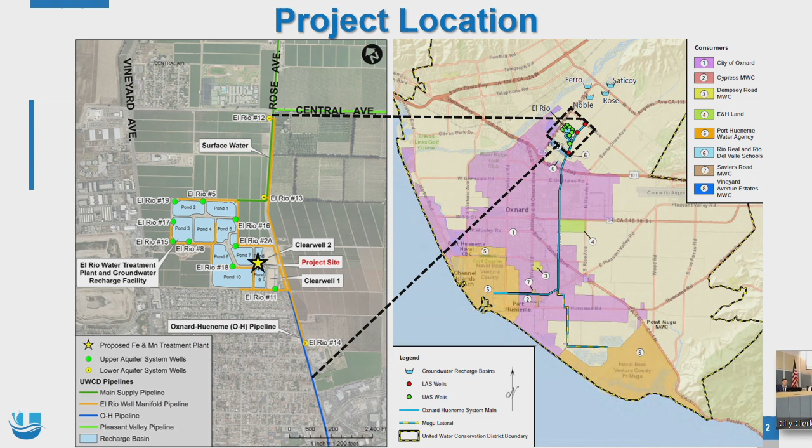We have groundwater recharge basins and several wells. The purpose of this facility is to perform groundwater recharge, but also extract groundwater and treat it for beneficial use through the OH pipeline. The OH pipeline serves several of our customers, including the City of Oxnard, Port Hueneme Water Agency, Naval Base Ventura County, a school district, and mutual water companies.

By way of background, I want to briefly talk about the hydrogeology setting at the site. We have existing wells; 9 of these wells are screened in the upper aquifer system, so relatively shallow wells. What happens is that we operate these wells, the water is treated, and then conveyed to the distribution system.

However, from time to time, especially during prolonged drought conditions, we have a challenging water quality issue: nitrate concentration can be elevated due to insufficient recharge of the groundwater basins. So in order to mitigate and control nitrate concentrations below the maximum contaminant level, we use 3 deep wells. By tapping into the lower aquifer system, the water extracted from these 3 wells gets blended with the water from the upper aquifer system, and that way we can meet the nitrate concentration levels.

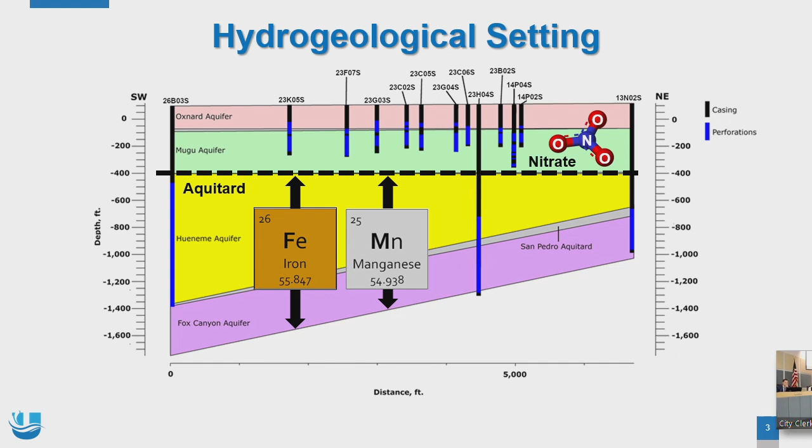Back in 2014, 2015, the Division of Drinking Water ordered us to treat the water from the deep wells, due to the fact that iron and manganese concentrations are pretty elevated, and from time to time they are actually above the secondary MCL, or maximum contaminant level. So we started planning this project and conducted a feasibility study to look at different treatment processes for removal of iron and manganese. The assessments pointed us to a filtration treatment.

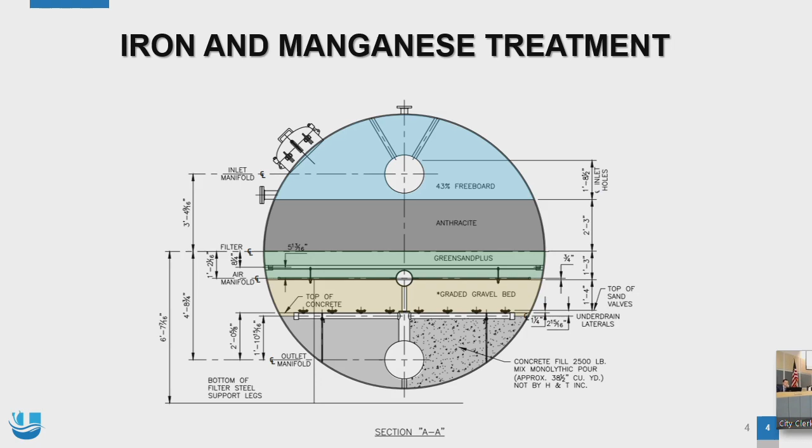And so using the green sand, we would then treat the water from the deeper wells and remove those to the non-detect concentration. Here is a layout of the project. So basically, the water is going to be treated through 2 filter vessels.

And depending on the process and how we control the process, the filter media that consists of green sand plus needs to be backwashed. So the backwash process starts, the filter media gets expanded, and the backwash water is stored in this wash water recovery tank. And once the filter media is cleaned and ready to operate, we would then recycle part of this backwash water into the head of the filtration process, and basically get to pretty much 99% of total water recovery. So there's very little solids that gets removed from the water due to the precipitation of iron and manganese. And please stop me if I'm going into too far details.

And then as part of this facility, we have several metering vaults that support the process. We also have a dedicated building that houses a new laboratory and electrical room with the PLCs and motor control centers that, again, supports this facility and ties this facility to the existing facility, and a blower. So through the backwash, not only we use the clean water for the backwash process, but we also use air to expand the filter media to make sure that the cleaning process is complete, or at least optimized.

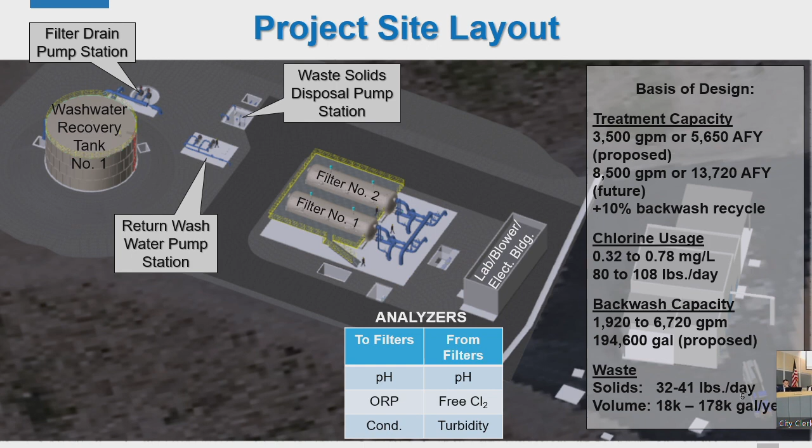So there are several parameters that are being followed or tracked to make sure that the process is functioning as the design intent. And those are included here. Basically, we look at the pH of the water, we look at the conductivity, because that would be an indication of the raw water quality, and the finished water should have chlorine residual, the pH that's being monitored, and other parameters that we are following and assessing.

So the process flow diagram in a simplified manner is as such, that the operation of the upper aquifer system wells continue as it has always been, meaning the groundwater gets extracted, it gets chlorinated before it goes to a clear well, and then again post-chlorination and ammonia is being added to have chloramination as a disinfection agent, and then the water gets distributed to the OH pipeline. With this facility, the water from lower aquifer system is treated through the iron and manganese, and it gets blended with the well water from the upper aquifer system and goes through the same treatment.

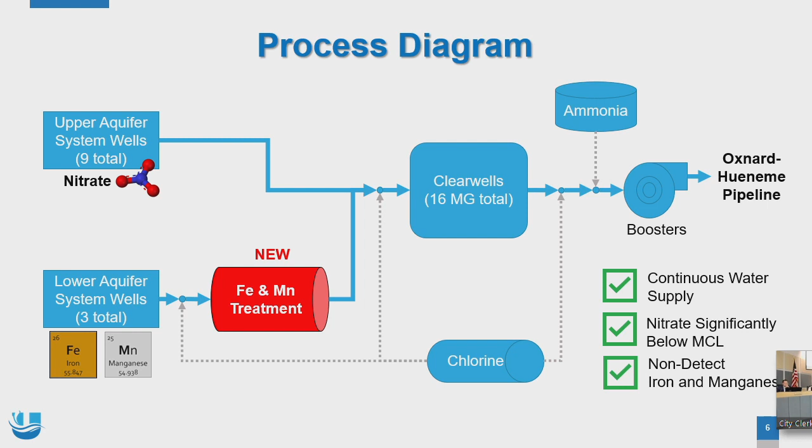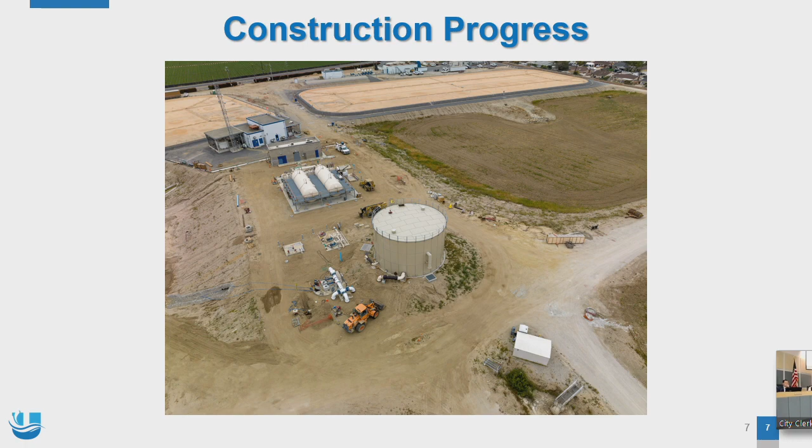So employing this facility, we would have continuous water supply, especially during the drought condition. We would have the nitrate concentration under control and below the MCL, and we expect to have non-detect iron and manganese concentrations in the finished water. In the next few slides, I'm going to show you the pictures of the construction phase of the project and the progress that we made.

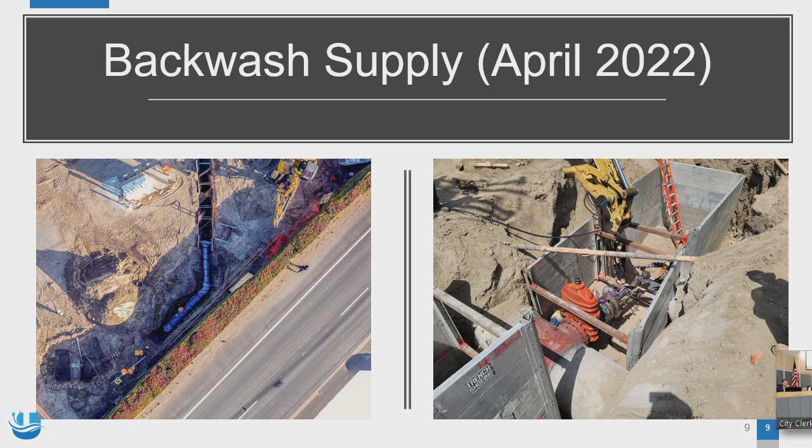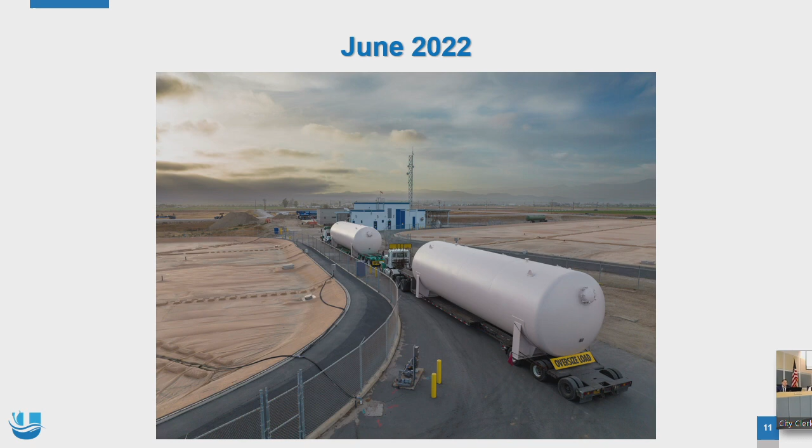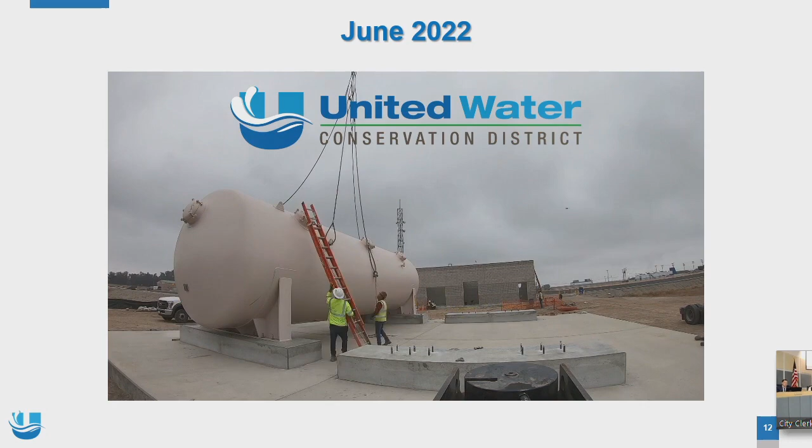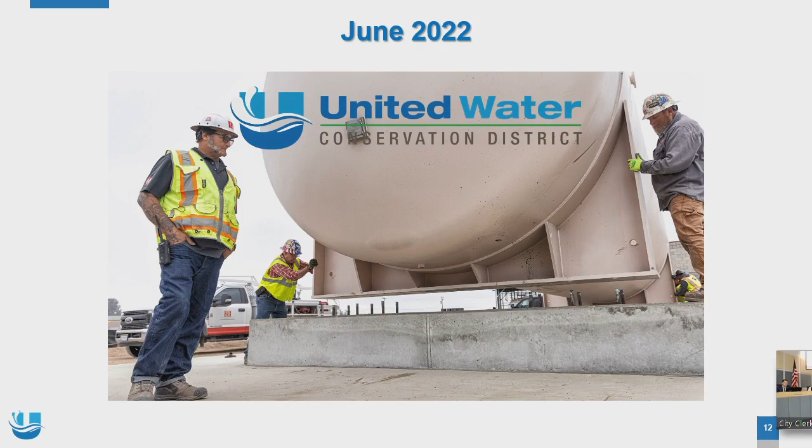So here is a short video of how smoothly and seamlessly these pressure or filter vessels were installed. As you can see, the concrete slabs or supports were already poured, the anchor bolts were already poured. So if things went wrong, then the anchor bolts would not fit properly, but that was not the case, and that was one of the milestones that we put behind us successfully.

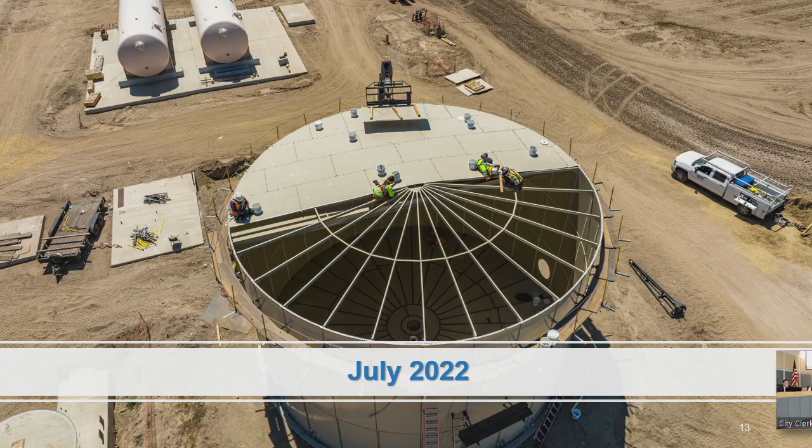In July 2022, a year ago, the construction of the wash water supply was completed. This is the inside of this tank. The tank has got a capacity of 195,000 gallons, so that's a pretty large tank with a 42 feet diameter.

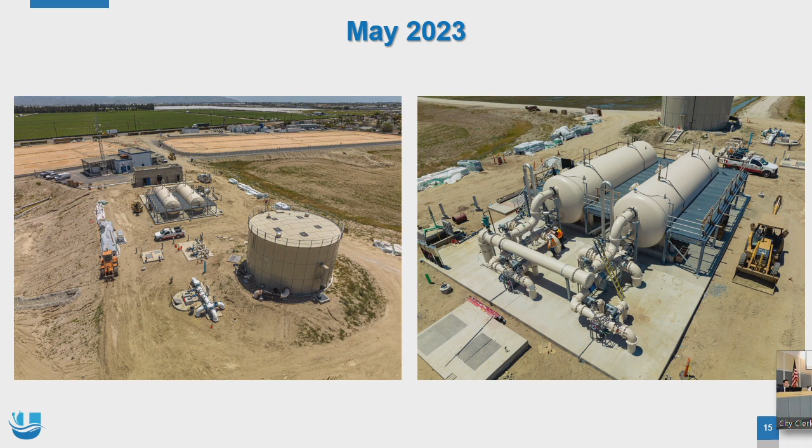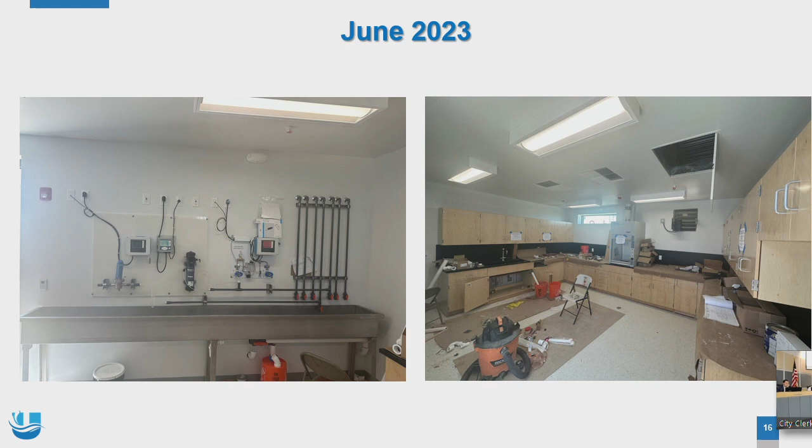It is pretty tall. And so what I can show you in this picture is the filter drain vault, the recycled pump station, the filter vessels, the building in the background, and behind this building, we have the chlorination building that is already in place and has been used for water treatment processes. These two images show the interior of the lab and the analyzers that are installed and sample ports from the different locations through the process.

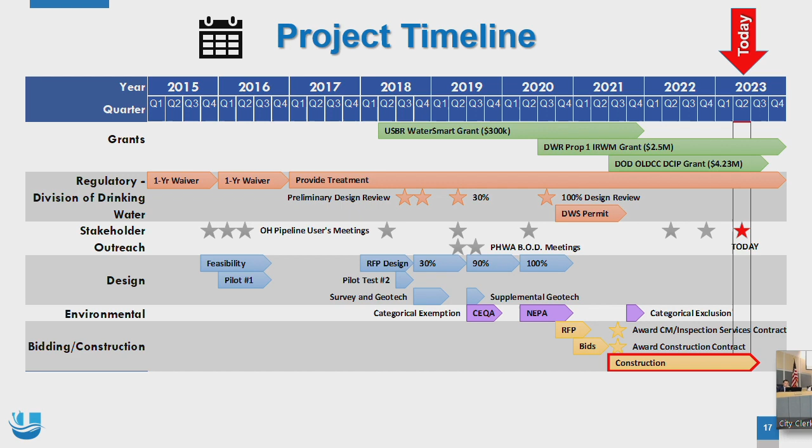This project timeline indicates that we started talking about this project with the Division of Drinking Water in 2015. We completed a feasibility study in 2016 and started the preliminary design in 2017. We conducted 2 pilot testings to make sure that the filter media that we selected would perform as intended. In 2018, we started the design. And in 2021, we went through the bidding for the construction. In the meantime, we applied for 3 grant funding programs, and I'm going to talk about that here.

This diagram shows the total project cost and the funding that was made available to us. The construction cost is $10.5 million, and that includes a couple of major change orders that I'm going to talk about. All other costs related to planning, construction management, and design are about $2.3 million. Of this total cost, we have secured 67% of the cost of the construction by 2 grants. One grant was provided by the Department of Water Resources, IRWMP, that Ventura County applies for on an annual basis. With this program, we could secure $2.5 million in state grants.

In 2021, we also had an opportunity to apply for a grant program provided by the Department of Defense. That particular grant required the Buy American Act, and that is why the construction cost had a large change order, because the contract was already executed, and after the execution of the contract, we were approved for this $4.23 million grant. But the condition was that the equipment should follow the Buy American Act requirements. So right off the bat, we knew that we had a change order, because the contractor was not obligated to provide American-made equipment. However, that change order was executed, and the contractor started working as expected.

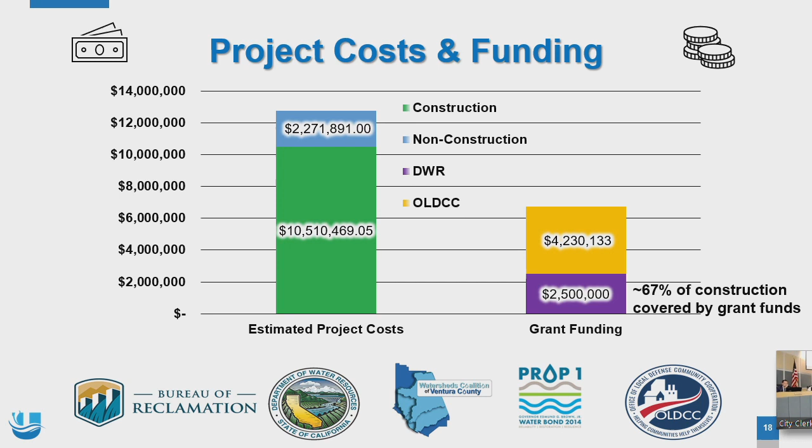And that concludes my presentation. If you have any questions, I'd be happy to answer. Thank you, Ms. Brawl. Are there any questions for our presenter? Could you do me a favor and speak again to the change order, and why? I didn't quite understand what the requirement was that led to the change order. Sure.

Yes. So we executed a contract with the selected contractor through a competitive bidding. By then, our specifications did not require equipment to be manufactured in the States. Oh, I see. Okay. When we received the grant, the requirement was to comply with the Buy American Act. And the Buy American Act obligates us to make sure, to the extent possible, to provide equipment that is American made. That is a very high level explanation. There are more details to it.

But nevertheless, we knew that automatically the price of the construction would go up, first of all because of the work that the contractor redid for all the submittals. These pieces of equipment needed to be changed to comply with the Buy American Act, in some cases, not in all cases. Therefore, we expected that the change order would be in the order of $600,000 to $1 million. We wanted to proceed with construction with no delay, since the grant funding also brings completion dates. So we commit ourselves to complete the project by a certain date.

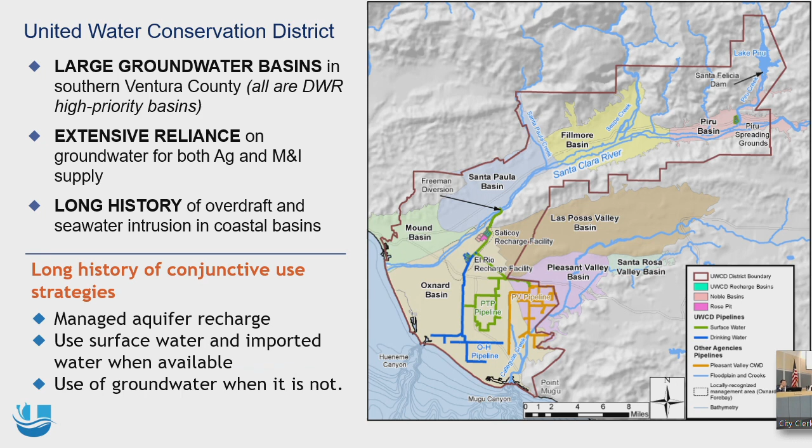So before I start talking about the project, I just wanted to briefly talk about the United Water Conservation District background and all the efforts that have been done since formation of the district in 1950 to combat seawater intrusion and overdraft conditions on the Oxnard Plain. The map here shows the district service area that starts from the northeast of the county near Santa Felicia Dam all the way to the Pacific Ocean. What I would like to point out here is the various projects that we have done throughout the years.

The construction of Santa Felicia Dam was completed in 1955. The purpose of this dam project was to store natural runoff and provide a way to receive imported water, such as State Water Project. As we move along Santa Clara River, in 1956, United constructed the El Rio recharge and water treatment facility. Then in the 80s, we constructed the pumping trough pipeline, indicated with this greenish line, and then the Pleasant Valley pipeline and reservoir. And in 1991, we constructed Freeman diversion.

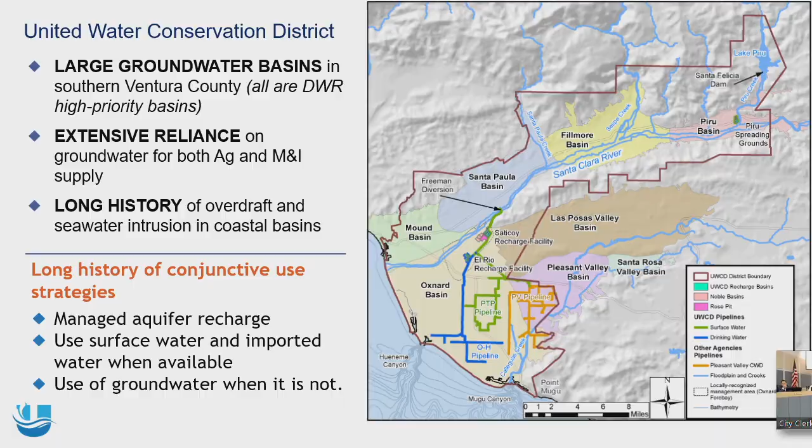So while releases from Santa Felicia Dam and all the natural runoff from tributaries along Santa Clara River support the groundwater recharge, when surface water is available, we provide surface water to PTP and PV in lieu of pumping extraction from the upper aquifer system. I mentioned the upper aquifer system, so I wanted to revisit that.

The Oxnard Basin in particular, the focus of this project, consists of the upper aquifer system with two primary aquifers, Oxnard Aquifer and Mugu Aquifer, and the lower aquifer system, Hueneme Aquifer, Fox Canyon, and so forth. The majority of pumping extraction has been happening from these two aquifers. Because these two aquifers are outcropping into the ocean around the coastline, there is a direct connection between seawater and these aquifers at Mugu Submarine Canyon and Hueneme Submarine Canyon. As pumping extraction on the Oxnard Plain has increased, seawater intrusion has worsened.

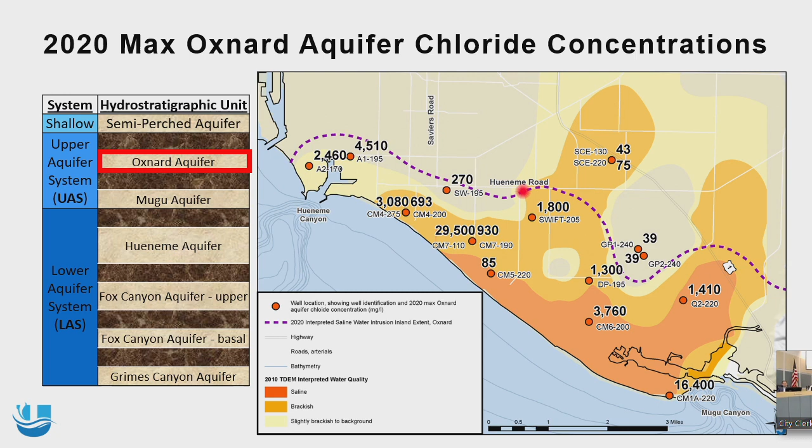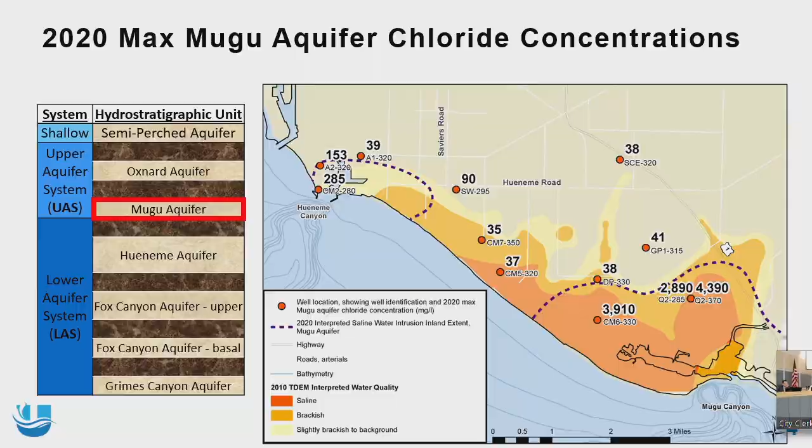So what is the extraction barrier and what's the concept behind that? United has been planning several approaches with regards to seawater intrusion abatement. So with the extraction barrier concept, what we are trying to do is to intercept the aquifers near the shore and create a cone of depression near the shore.

And with this concept, we would then bring the already impacted or contaminated groundwater due to seawater intrusion from inland and extract brackish water from the ocean. So by extracting this high saline water, we are hoping that we reverse the flow of seawater intrusion that has been inland towards the coast.

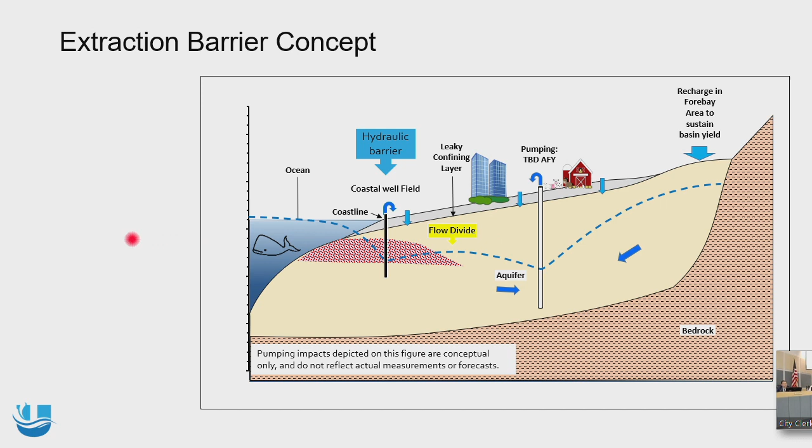In 2019, we started to expand our regional groundwater model to the solute or chloride transport model. And what we were trying to do is, through the groundwater model, look at the feasibility of an extraction barrier near the coast. And this effort, or what we call feasibility study, was supported by a grant from the State Water Resources Control Board Prop 1, and that allowed us to expand and calibrate our model and demonstrate the effectiveness of an extraction barrier.

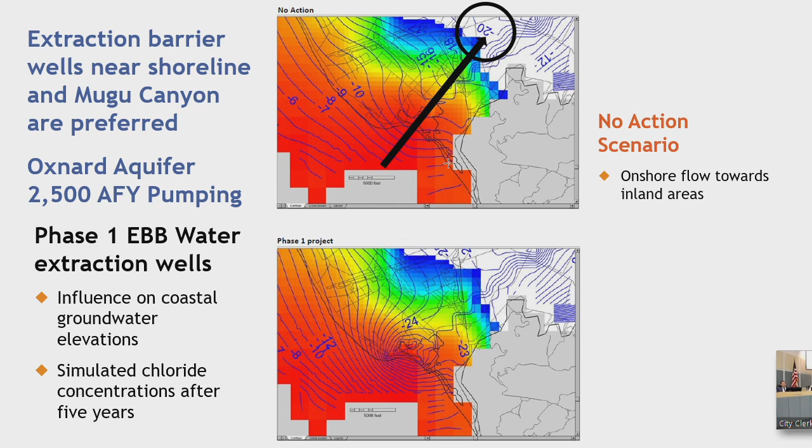And so here, I know that on this projector it is pretty hard to see, but when you are looking closer at the hydraulic gradients and the chloride concentration, you can see that you are limiting the extension of seawater intrusion through this exercise.

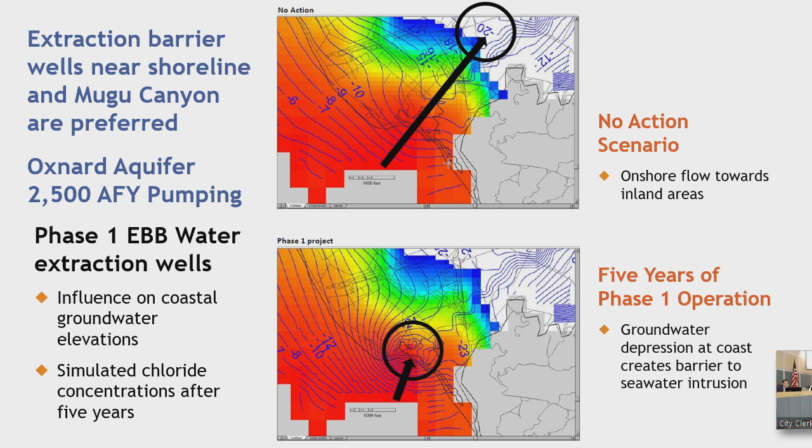In 2019, United started approaching Naval Base Ventura County and proposing Point Mugu as the potential project location for EBB Water. In the past, and as of 2014, United had been looking at other areas off the coast, but our groundwater model indicated that intercepting seawater right at the coast would be beneficial rather than being more inland, which pulls more seawater from the ocean into the inland location. So that seemed to be the best approach.

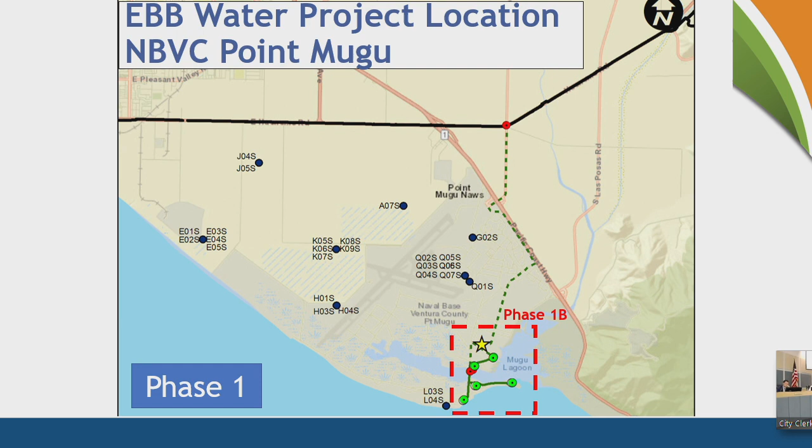And since 2019, we have been conducting a number of site visits and site assessments in collaboration with Naval Base Ventura County and Mr. Nathan Jacobson to identify the suitable locations for a number of extraction wells. So what I am showing here is a number of wells that we are planning to drill and implement at Point Mugu as part of the first phase of the project.

And before I talk about the different phases of the project, I want to touch base on the benefits that this project would offer both on the regional basis and local basis. So we have been supporting Fox Canyon GMA, as you know, through our groundwater model. And we know that the Oxnard Basin groundwater sustainability goal needs to be reached by 2040. And we believe that by implementing this project, we would significantly support the Fox Canyon GMA in meeting the groundwater sustainability goal by 2040.

Through collaboration with Naval Base Ventura County, we know that this project would support Naval Base Ventura County mission objectives. And in addition to that, by providing a new local supply once the project is fully implemented, the local supply would protect agricultural activities in this area, in particular in the Oxnard Plain. It also provides a new drought-resilient water supply, and I will explain how.

The first part of the project is to establish an extraction barrier that would limit seawater intrusion inland. However, by treating the extracted water for beneficial use, we would create a local water supply independent of climate change and weather conditions. And so that's basically the ultimate goal.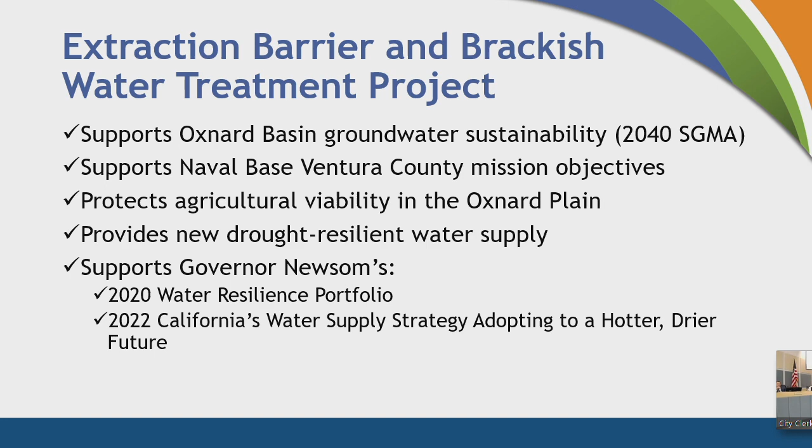During phase one, the objective is to verify and evaluate the model results with the field data we are collecting through this demonstration phase. The extracted water will be discharged, and there are several discharge locations we are currently evaluating, one of which would be Mugu Lagoon.

Once we collect data that supports the efficacy of the extraction barrier, and also provides data for us to move into the second phase, which would be treatment, we will proceed with the second phase of the project. At that point, we are planning to extend the extraction barrier by installing more wells into the Oxnard aquifer and Mugu aquifer.

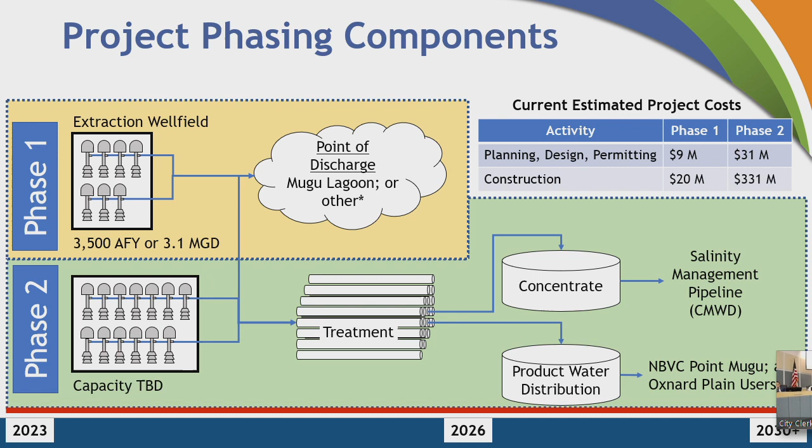Currently, we have received several funding awards. I mentioned that the State Water Resources Control Board Prop 1 supported the feasibility study; through that program we secured about $124,000. Early this year, we received an award for the first phase of the project, with grant funding through Prop 1, again by the State Water Resources Control Board, of about $8.4 million.

In addition, we have received grant funding worth $1.5 million from the SGM grant, which will allow us to design and construct a number of new monitoring wells at Point Mugu to support this project, creating a baseline prior to and during extraction to evaluate the hydrological impact of this project.

Throughout this process, which is fairly recent, we have received significant support from our neighboring agencies and different organizations, including Naval Base Ventura County, Captain Kimnock, and the U.S. Navy Southwest region. All these support letters have basically validated our approach and how beneficial this project could be for the region.